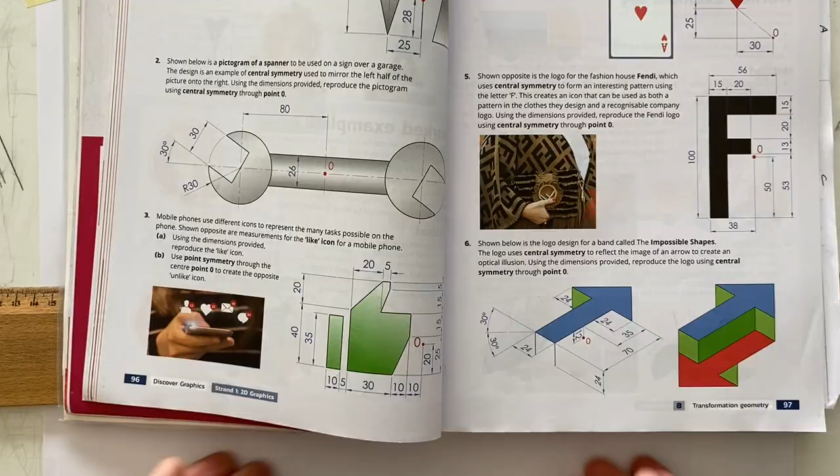So this video is going to go through this question here on page 96 of your book. It's all got to do with central symmetry, which is what we've been covering in the last two classes. So it's the thumbs up symbol, or the like icon as it says. And what I'll start off doing is just drawing out using the measurements what we see in the question.

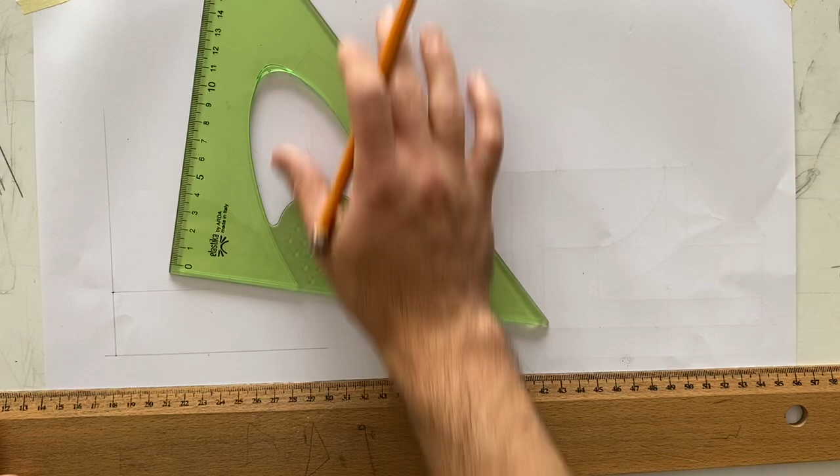So we'll start it off. It's 35mm up for the little rectangle on the left hand side, and then it's 10 wide with a 5mm gap in between that and the actual hand itself. And then the height up then is 40 for the back of the hand, and then it goes across 20 and up a further 20. So across 20 and then up again, further 20 there. And they connect then just at 45 degrees.

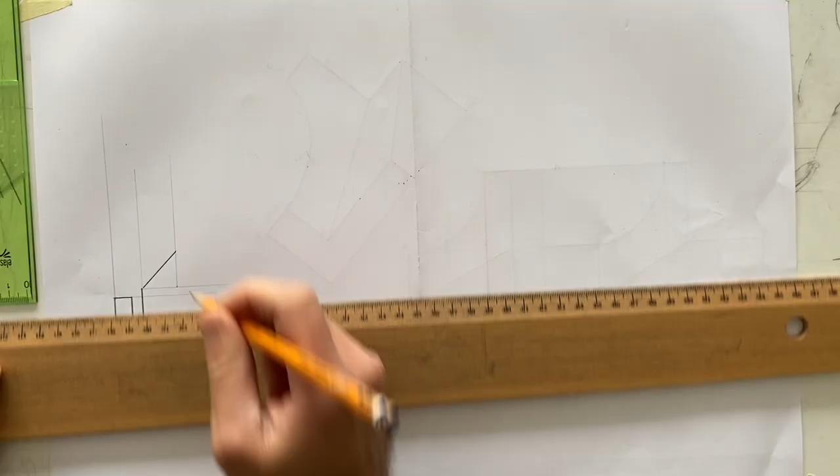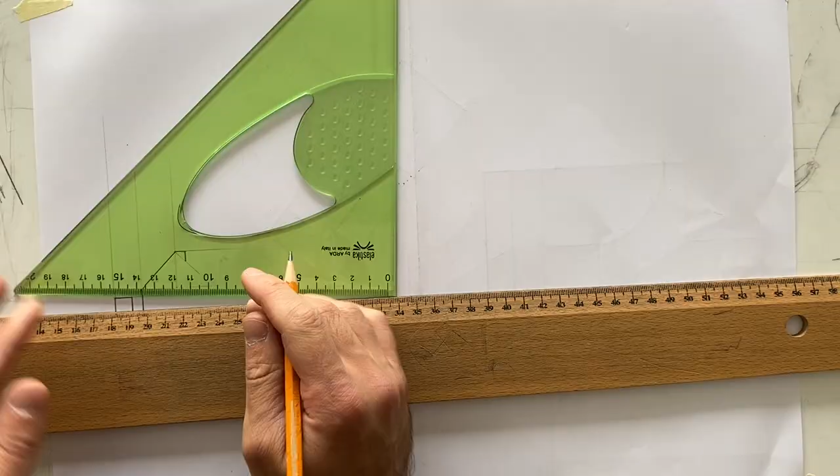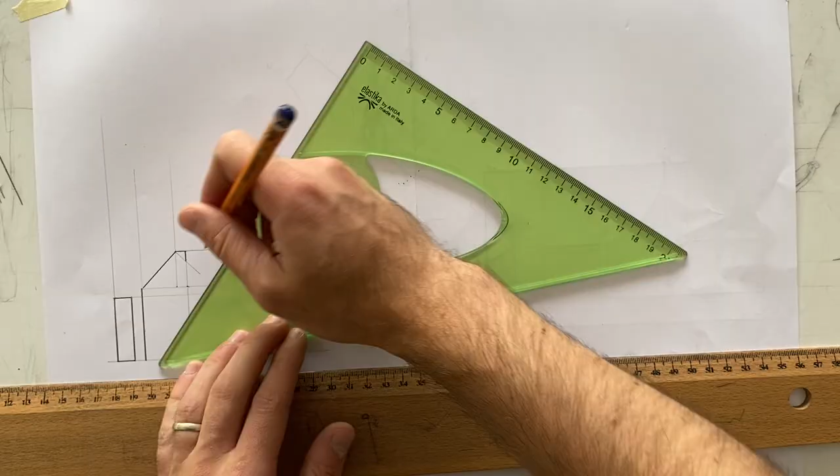After that then, we go across 5. That point there. And there's a 5mm drop down then. So what I can do is go 45 degrees back this way, straight down, and that's equivalent to go down 5mm as well. And then we have a further 15 down, and that will go back to hit our 20mm. Just draw my line just down here. Go down 15mm, which happens at that point, and it's basically going back to this point here, so I already actually have it like that there.

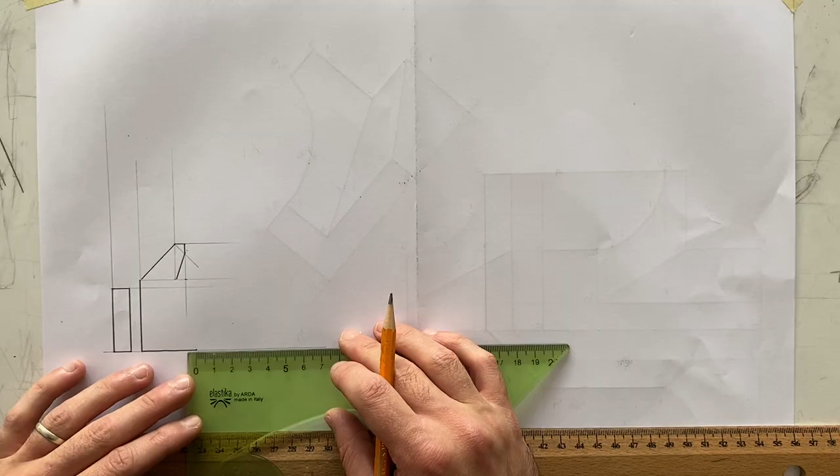And then start from the bottom of the hand. It's 30mm across to there. Let's try and keep that board as straight as I can for you. And then it goes across 10 and another 10. And the second 10 is going to give me O. So let's take that up. Take that line up there. And it's up 20 for O here. So now I have O.

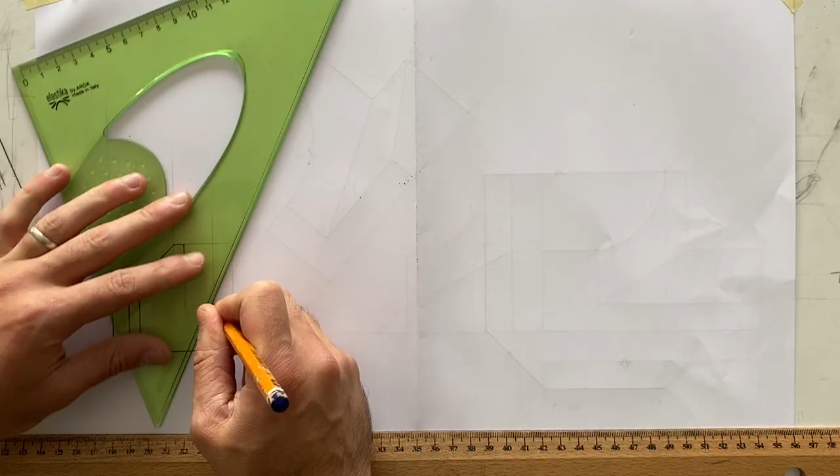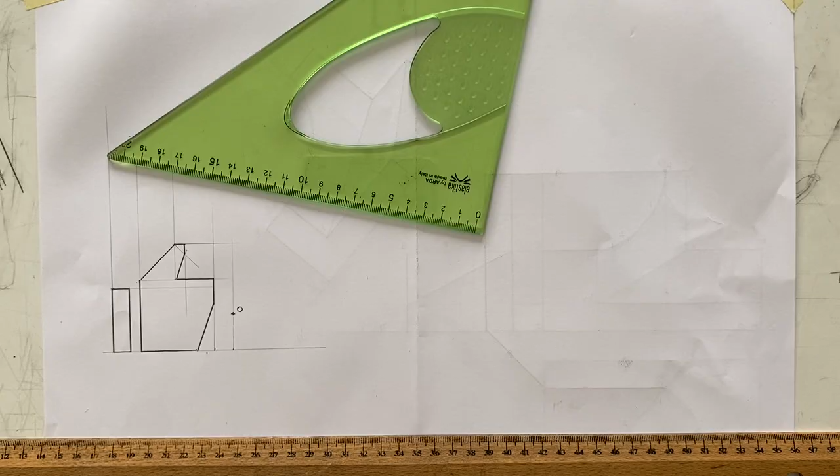And it's up 25 for this point here, which connects to the hand like that. And then it's just simply going straight up and back across there like that. So there's O. That's going to be our center of symmetry. So you remember with central symmetry, two key things are all points will go through a fixed point, which is going to be O for us, and all points will move their own unique distance.

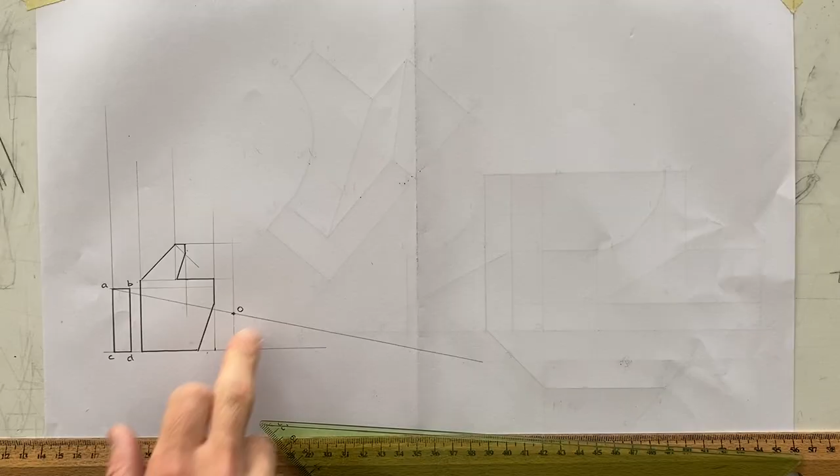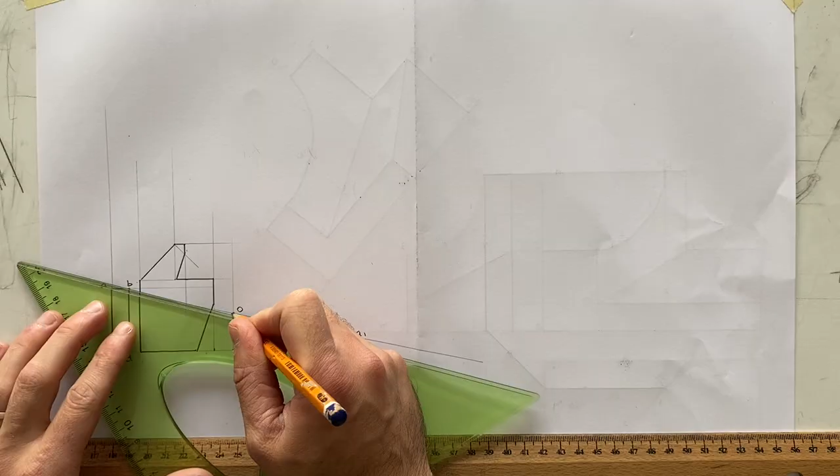So for example, if I label these four corners of my rectangle, A, B, C, and D. I take A through. So every point goes through the center point, and it goes its own unique distance. I take the distance of A to O, step it across, and I get A1. And the aim of this is basically to get the object to go across the other side and flip upside down. So remember, kind of like the deck of cards. When we look at any card, it's through central symmetry. It's the way that the top half of the card is taken down to the bottom half.

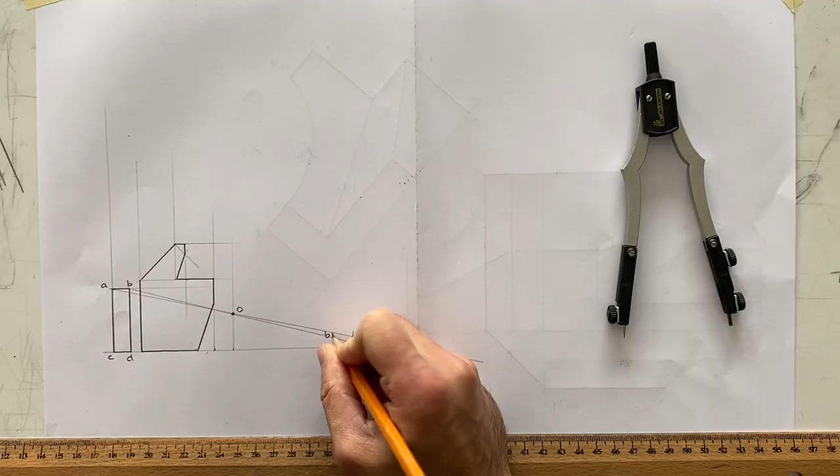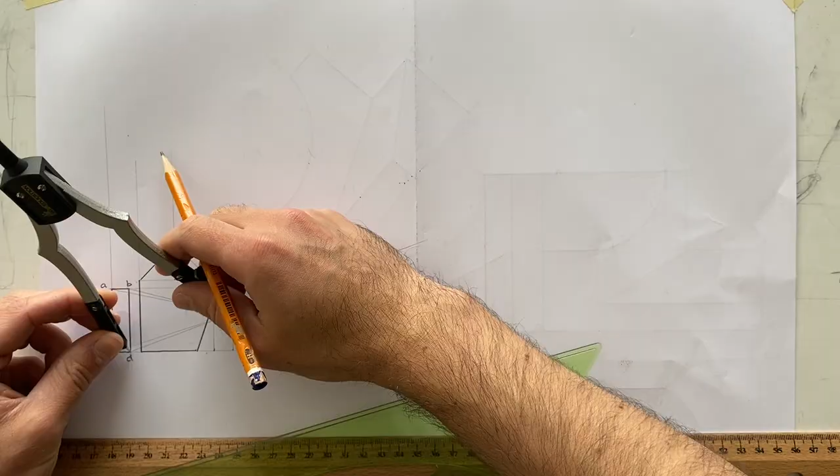So point B is the same thing. B goes through O. We take the distance of B to O, step it across. And there we have B1. Same thing again with point C. C goes through there. Take our distance to O, step it across. We get C1. And then the exact same with D. Take D through straight across. We get D1 there. And they can be joined together. So C1 connects to D1. D1 connects to A1, A1 to B1 and B1 back up to D1.

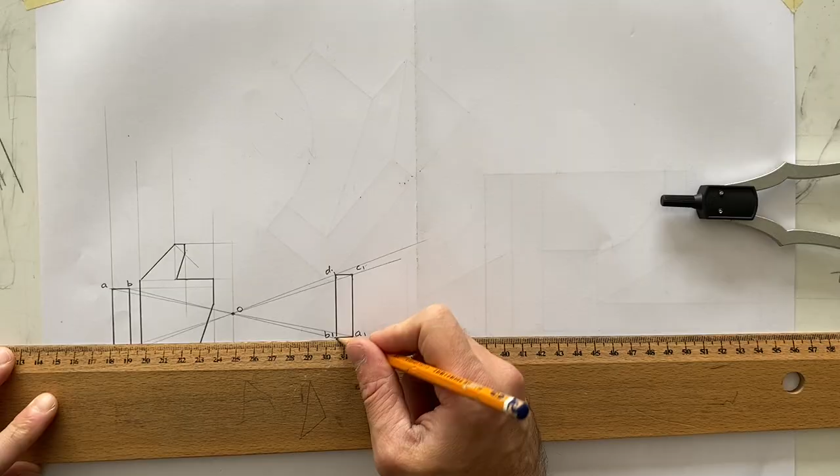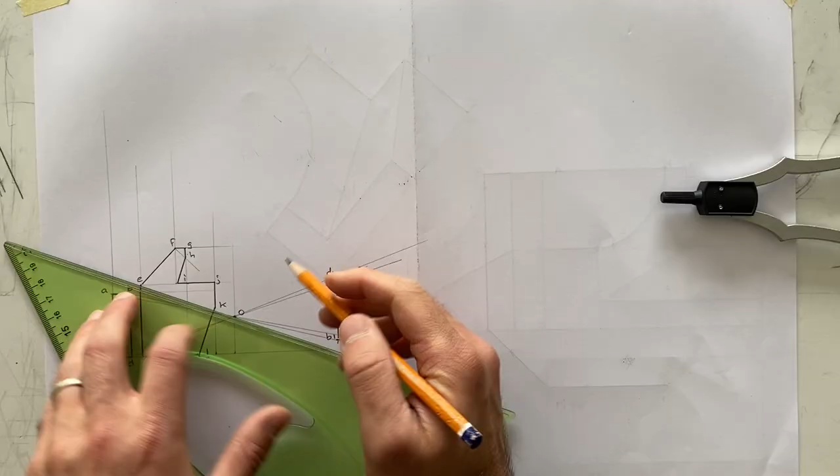And I'm going to do the exact same thing now with my other points. I'm going to start up here and I'll go with that as point E, F, G, H, I, J, K, L and M. So point E goes through there. The distance from E to O is that, step across the far side. There's point E1. And we have F goes down through there. Take the distance from F to O, step it across the other side. So E1 and that's F1. And I'll join them up as I go.

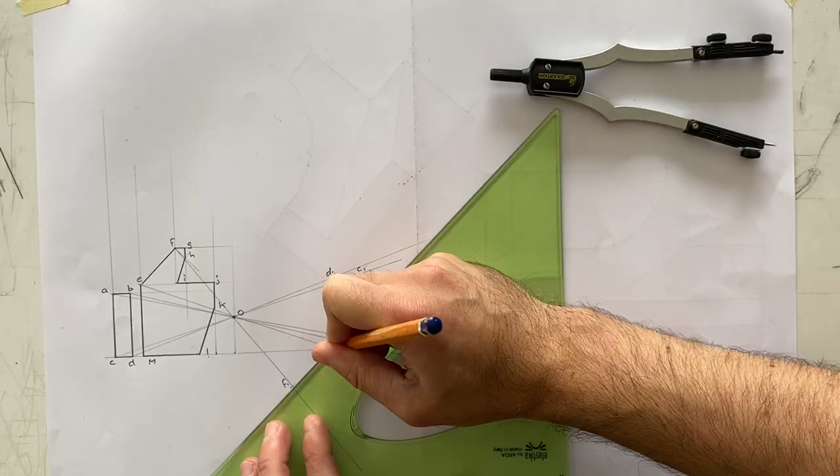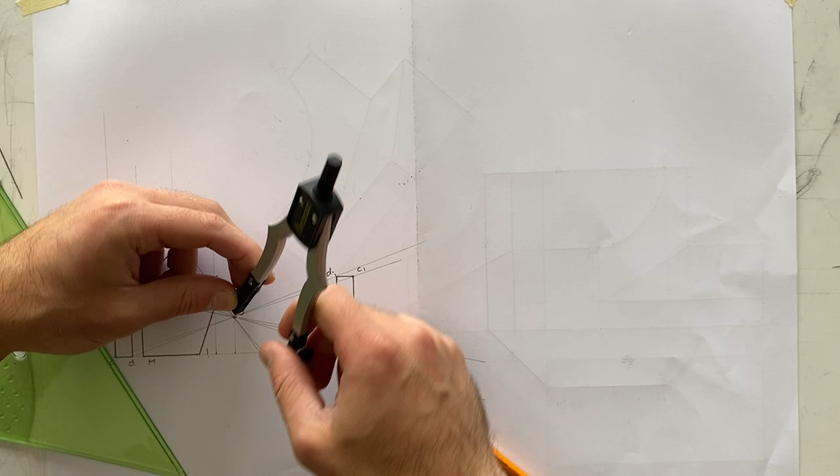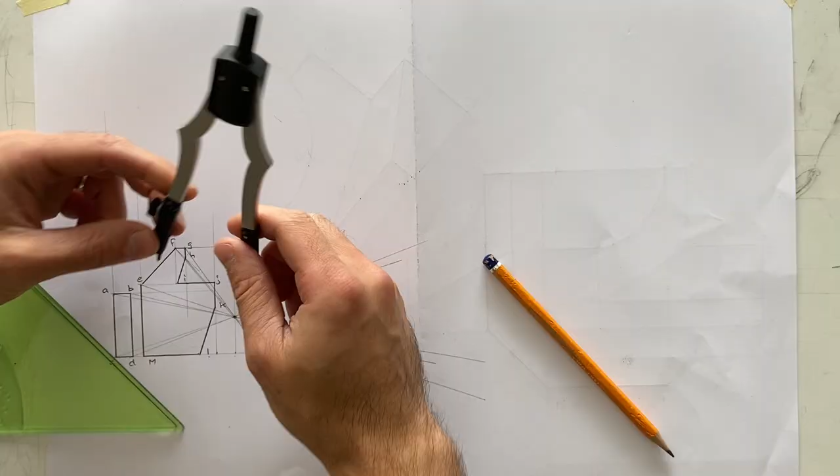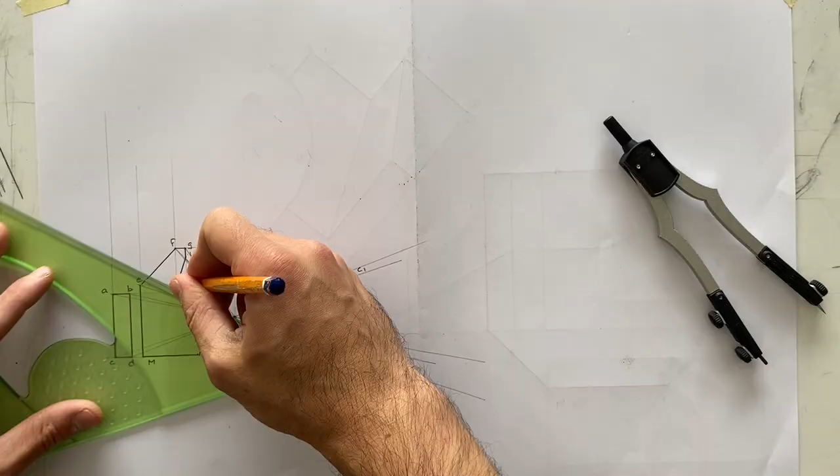Then I have G. G goes through there. G to O, step it across the other side. There's G1. I'll make sure I can see it because it's going over my letters. So where F crosses over, like that. And then I have H. So you can see the importance of labeling them. It makes it easier to follow. G goes to H1 there. Then I have I. I goes through there, and you can also see I'm taking one point at a time. If I took all those lines through at once, we'd end up with far too many, we'd basically make a mistake. You can see how close G, H and I are there.

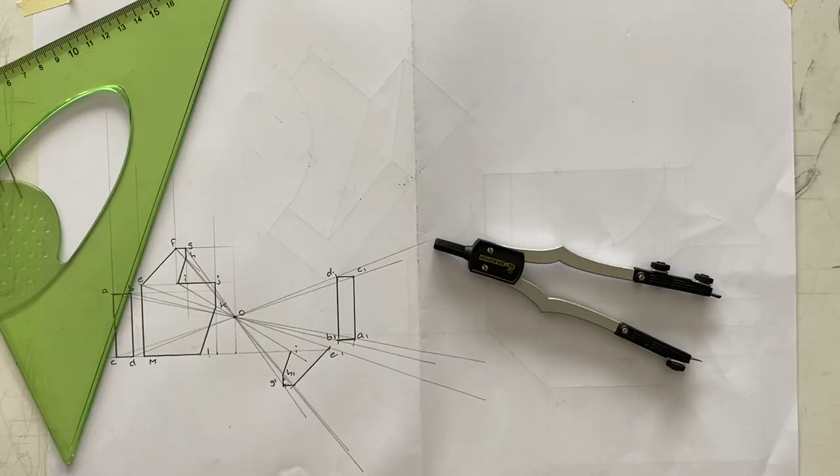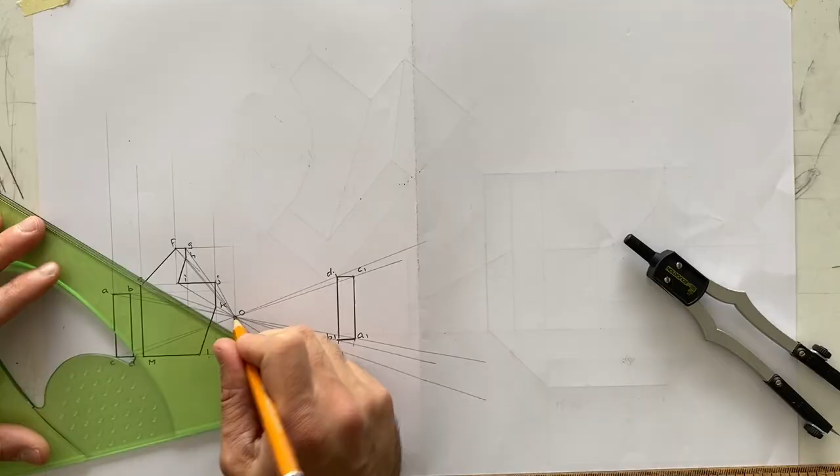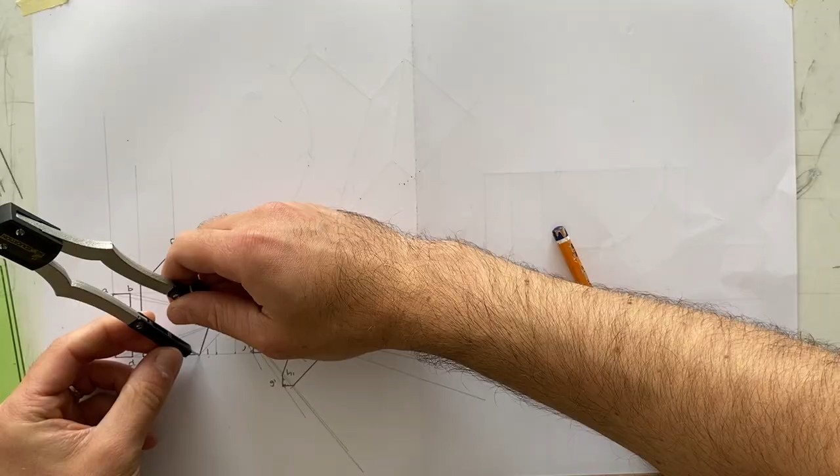So I then connects to H like that there, and then J. J goes down through there. Take J to O, step it across. There's J1, that's I1. That goes straight across there. And then we have K. K joins across, stops there, gives me K1. And then I have L and M then to finish it off. So you can see the way I'm doing this, I'm taking them one at a time. And I'm joining them up as I go. There's L1.

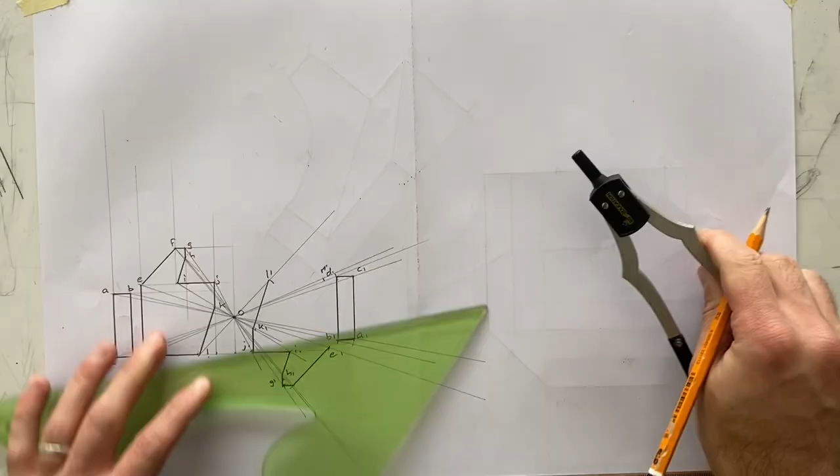And then my last point, M, is there. M to O through the far side. Gives me M1 there. And then M connects back to E over there. And that completes the question there. So hopefully that video helps anyone who may have been stuck on that one.